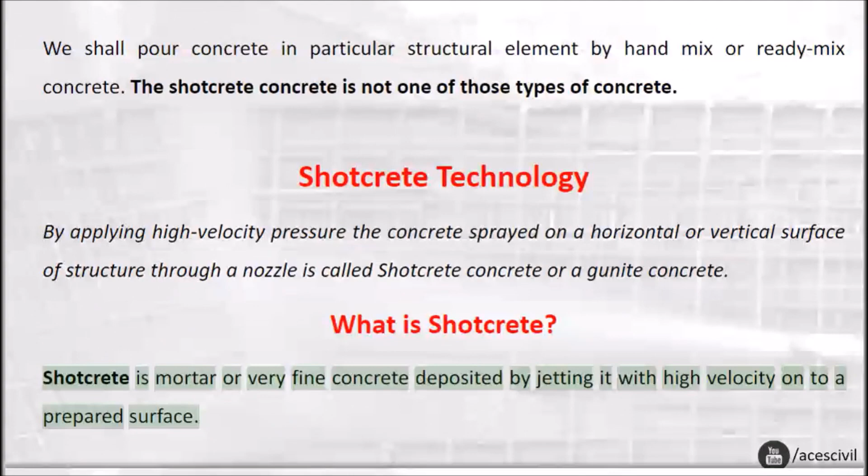By applying high-velocity pressure, the concrete sprayed on a horizontal or vertical surface of a structure through a nozzle is called shotcrete concrete or gunite concrete. What is shotcrete? Shotcrete is mortar or very fine concrete deposited by jetting it with high velocity onto a prepared surface.

Shotcrete offers advantages over conventional concrete in a variety of new construction because of fewer formwork requirements, requiring only a small portable plant for manufacture and placement. It is capable of excellent bonding with a number of materials, and this may be an important consideration.

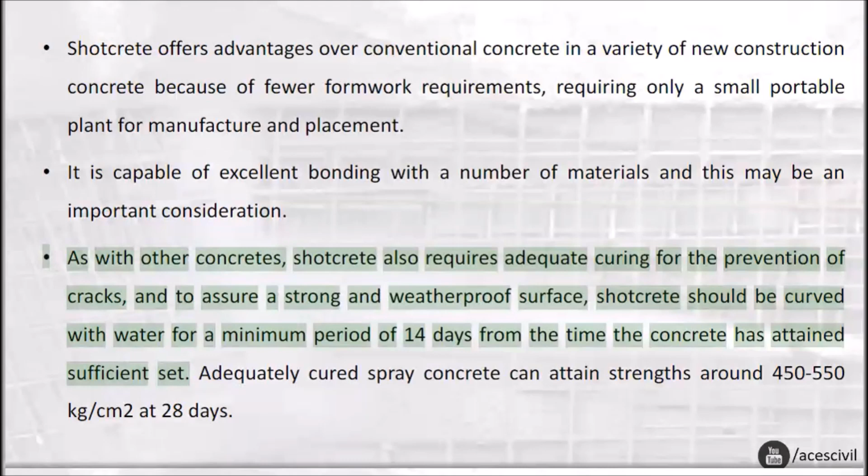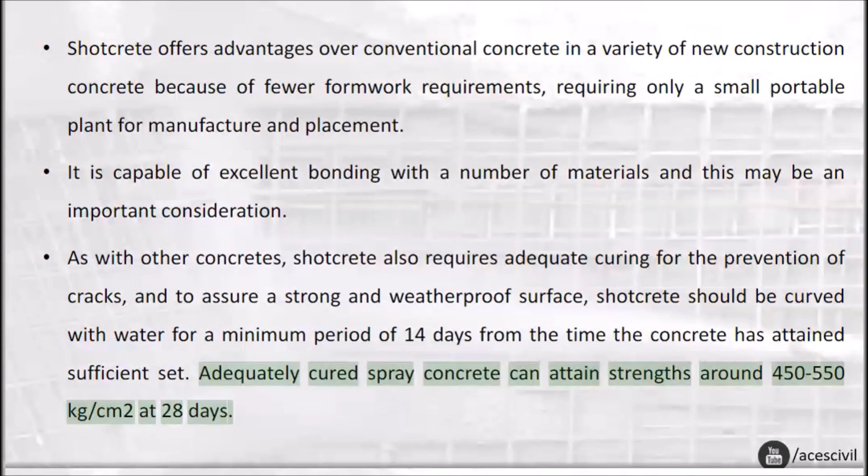As with other concretes, shotcrete also requires adequate curing for the prevention of cracks, and to assure a strong and weatherproof surface, shotcrete should be cured with water for a minimum period of 14 days from the time the concrete has attained sufficient set. Adequately cured sprayed concrete can attain strengths around 450 to 550 kg/cm² at 28 days. Sometimes instead of concrete, mortar will also be applied on the structural surface.

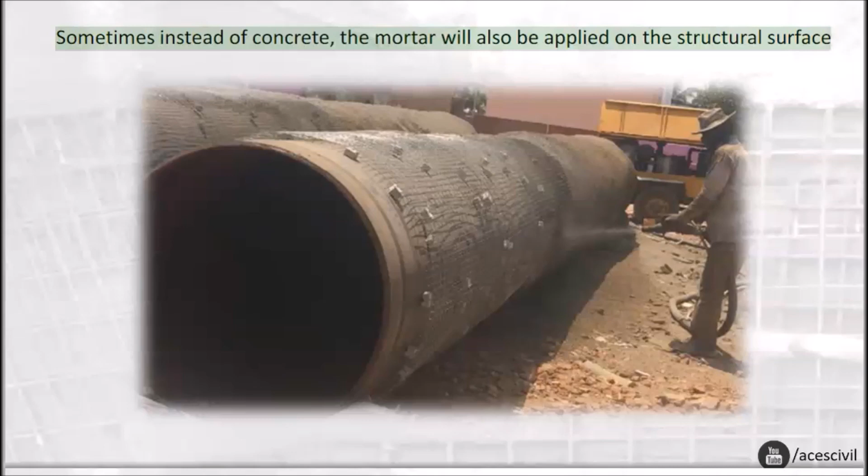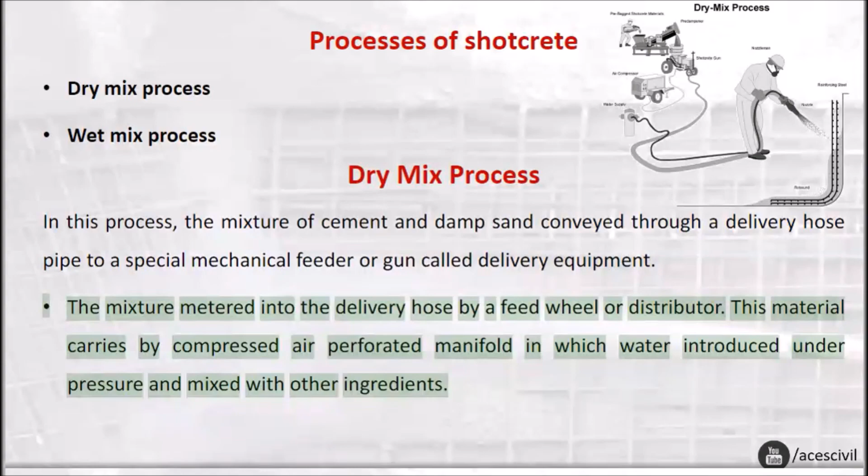Processes of shotcrete: dry mix process and wet mix process. Dry mix process. In this process, the mixture of cement and damp sand is conveyed through a delivery hose pipe to a special mechanical feeder or gun called delivery equipment. The mixture is metered into the delivery hose by a feed wheel or distributor. This material is carried by compressed air to a perforated manifold in which water is introduced under pressure and mixed with the other ingredients.

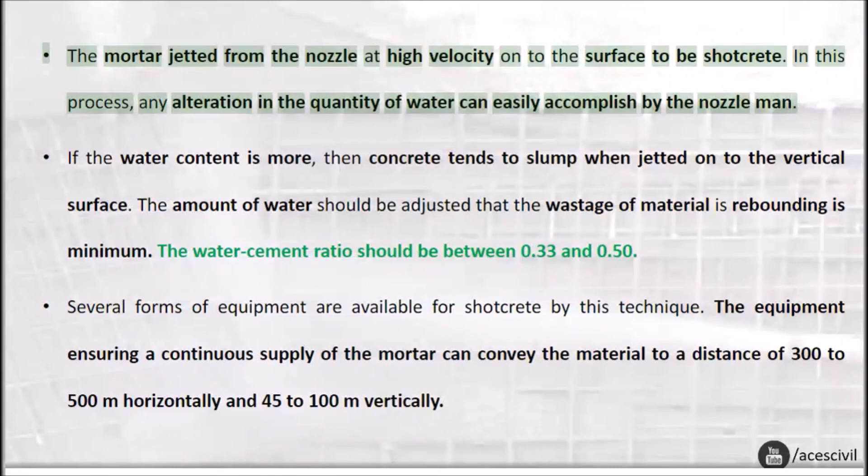The mortar is jetted from the nozzle at high velocity onto the surface to be shotcreted. In this process, any alteration in the quantity of water can easily be accomplished by the nozzle man. If the water content is more, the concrete tends to slump when jetted onto a vertical surface. The amount of water should be adjusted so that the wastage of material as rebound is minimum. The water-cement ratio should be between 0.33 and 0.50.

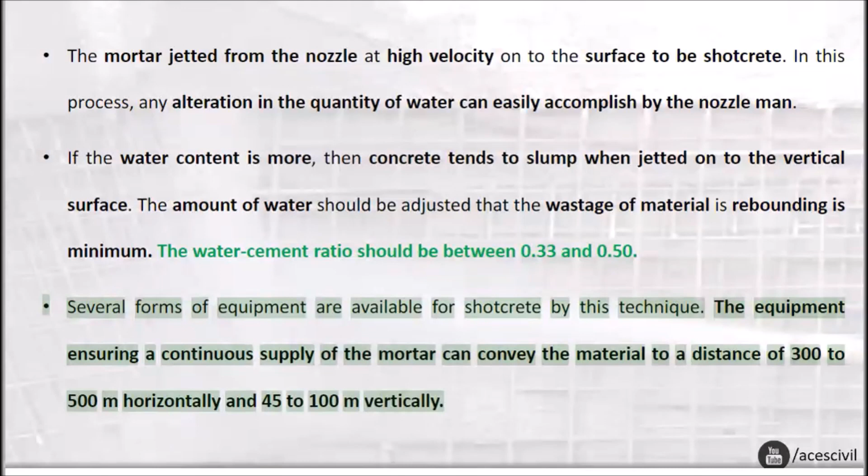Several forms of equipment are available for shotcrete by this technique. The equipment ensuring a continuous supply of the mortar can convey the material to a distance of 300 to 500 m horizontally and 45 to 100 m vertically.

Wet mix process. In this process, all the ingredients such as cement, sand, small-sized coarse aggregate and water are mixed before entering the chamber of the delivery equipment. The ready mixed concrete is metered at 7 atmospheres to a nozzle, where additional air is injected to increase the velocity and improve the gunning pattern. Equipment capable of placing concrete at the rate of 3 to 9 m³/hour is available.

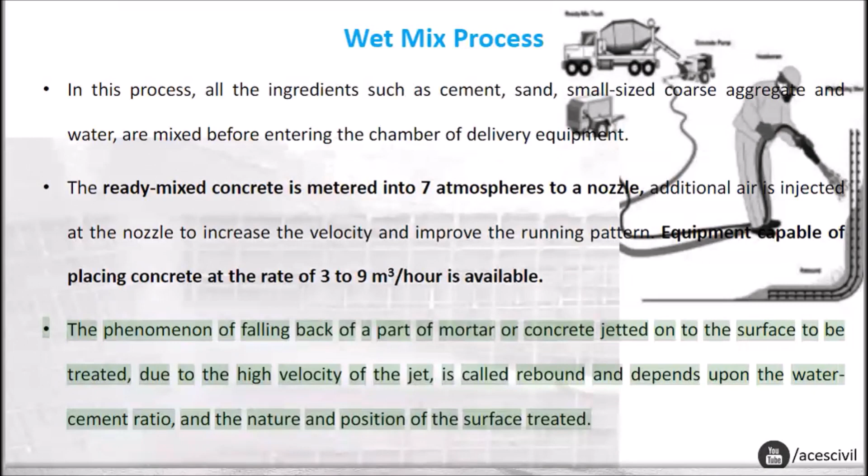The phenomenon of falling back of a part of the mortar or concrete jetted onto the surface to be treated, due to the high velocity of the jet, is called rebound, and depends upon the water-cement ratio and the nature and position of the surface treated. The approximate range of rebound is 5 to 15% for horizontal slabs, 15 to 30% for sloping and vertical surfaces, and 20 to 50% for the treatment of overhead surfaces and corners.

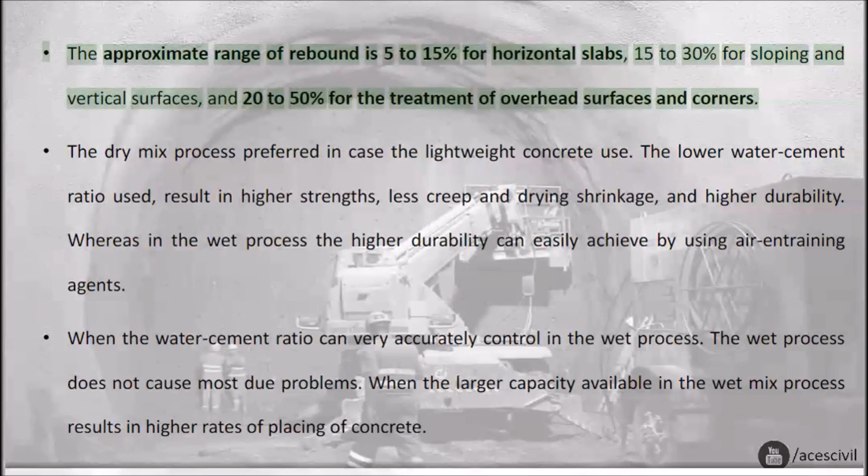The dry mix process is preferred in case lightweight concrete is used. The lower water-cement ratio used results in higher strengths, less creep and drying shrinkage, and higher durability. Whereas in the wet process, higher durability can easily be achieved by using air entraining agents.

The water-cement ratio can be very accurately controlled in the wet process. The wet process does not cause most dust problems. The larger capacity available in the wet mix process results in higher rates of placing of concrete.

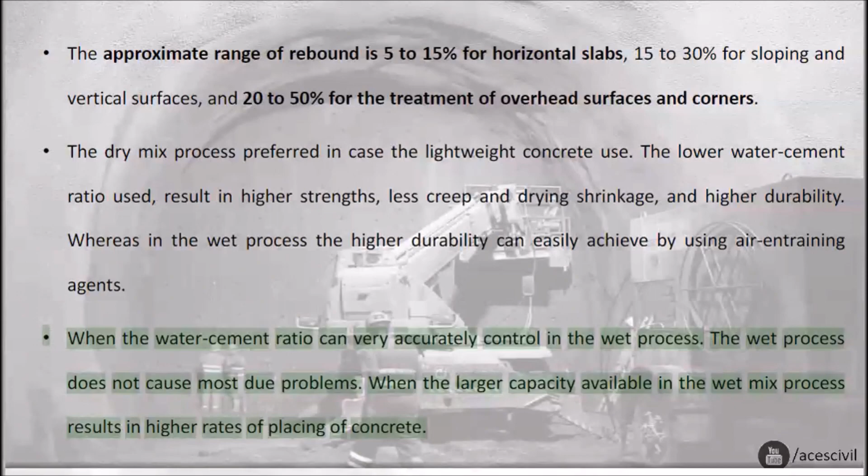Shotcrete concrete mix design. The mix ratio for shotcrete concrete is the same as what we use in conventional concrete. The mixing material and water-cement ratio may change since shotcrete is mostly used in waterlogged areas or the seashore. The concrete mix design may change as per the requirement where it would be used.

The components of the concrete mix shall be weight batched before mixing by a proper weigh batcher. Batching shall be based on the weight of single components with accuracy within plus or minus 1.0% of the values corresponding to the selected type of mix.

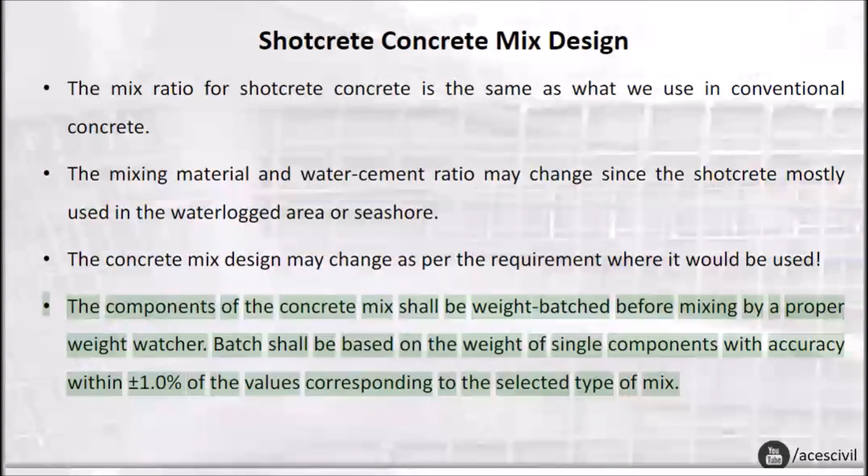Reinforcement for shotcrete concrete. The reinforcement for shotcrete concrete depends upon the purpose of use, because sometimes steel fabric wire will be used as reinforcement. Mostly TMT will be used as reinforcement. When shotcrete concrete is applied on mild steel pipe, 13 gauge or 14 gauge steel fabric wire will be used as reinforcement.

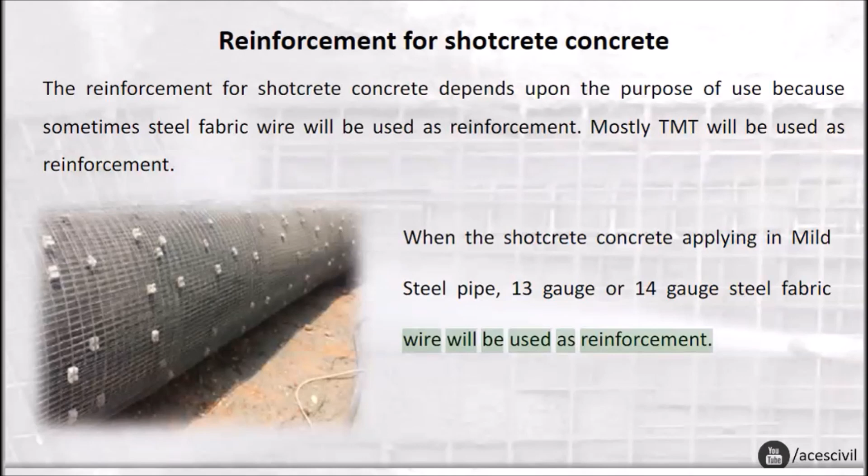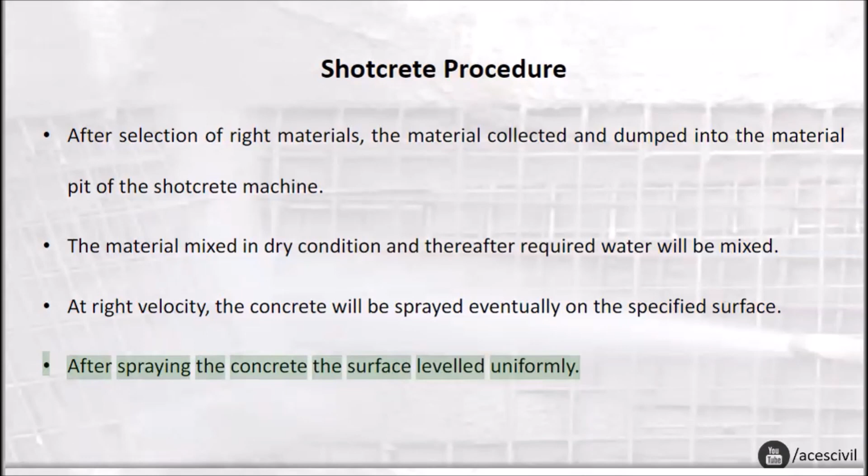Shotcrete procedure. After selection of the right materials, the material is collected and dumped into the material pit of the shotcrete machine. The material is mixed in dry condition and thereafter the required water will be mixed. At the right velocity, the concrete will be sprayed on the specified surface. After spraying the concrete, the surface is leveled uniformly.

Properties of shotcrete. A small maximum size aggregate is used and cement content is high. It should enhance durability in most cases. Whereas conventional concrete is consolidated by vibration, shotcrete is consolidated by the impact of a high-velocity jet impinging on the surface. This process not only increases the cement content due to rebound but also brings about different air void systems affecting the durability of shotcrete.

The application procedures have a greater effect on the in-place properties of shotcrete than the mix proportions. Shotcrete specimens are usually sawed from test panels of about 1 meter square and 75 mm thick made by gunning onto plywood forms.

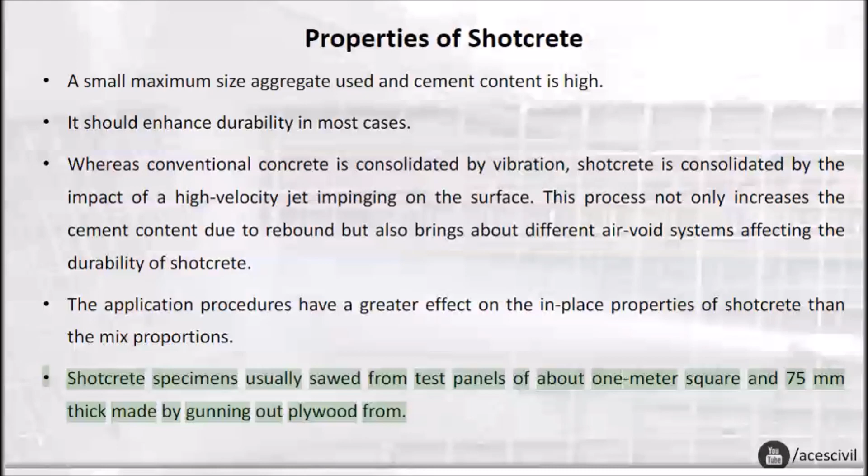Applications of shotcrete. Shotcrete is widely used in different constructions such as thin overhead vertical or horizontal surfaces, particularly curved or folded sections, canal, reservoir, and tunnel lining. It is also used in swimming pools, water retaining structures, and pre-stressed tanks. Shotcrete has been successfully used in the stabilization of rock slopes and temporary protection of freshly excavated rock surfaces.

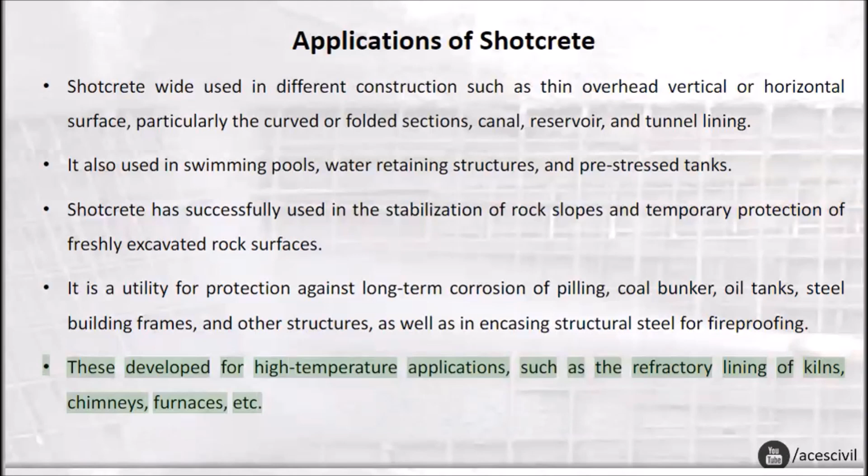It is useful for protection against long-term corrosion of piling, coal bunkers, oil tanks, steel building frames, and other structures, as well as in encasing structural steel for fireproofing. It has been developed for high-temperature applications, such as the refractory lining of kilns, chimneys, furnaces, etc.

Uses of shotcrete. It is very effective in repair and rehabilitation works. We can pour concrete either on a horizontal or vertical surface. Mostly shotcrete is used to construct a retaining wall where the soil is very loose. Shotcrete concrete is mainly used in underground oil lines or water pipelines where the pipe is buried under the earth, to avoid pipe corrosion. To avoid internal damages of the surface.

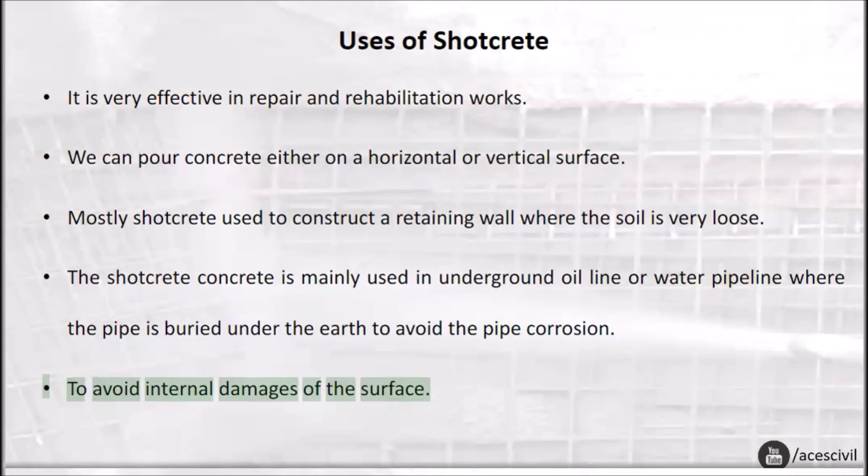Advantages and disadvantages of shotcrete. Advantages of shotcrete concrete: it can reduce manpower. Only minimal formwork is required. Economically good compared to conventional concrete. We can easily control the water-cement ratio. Cost-friendly for repair and rehabilitation work.

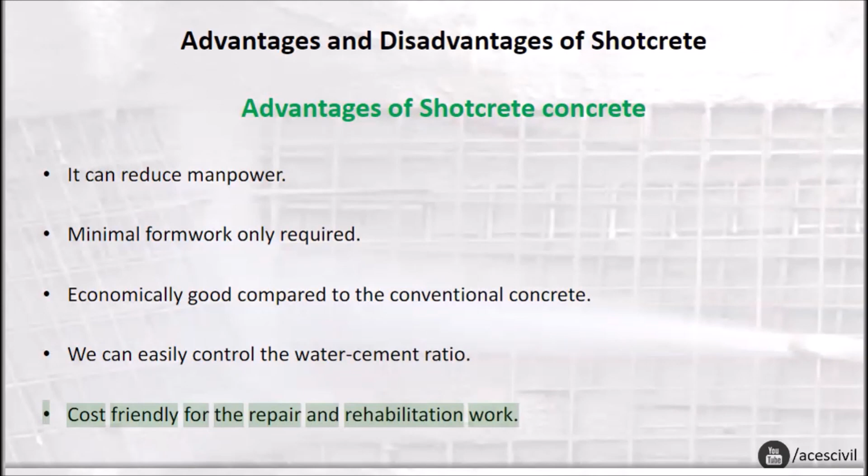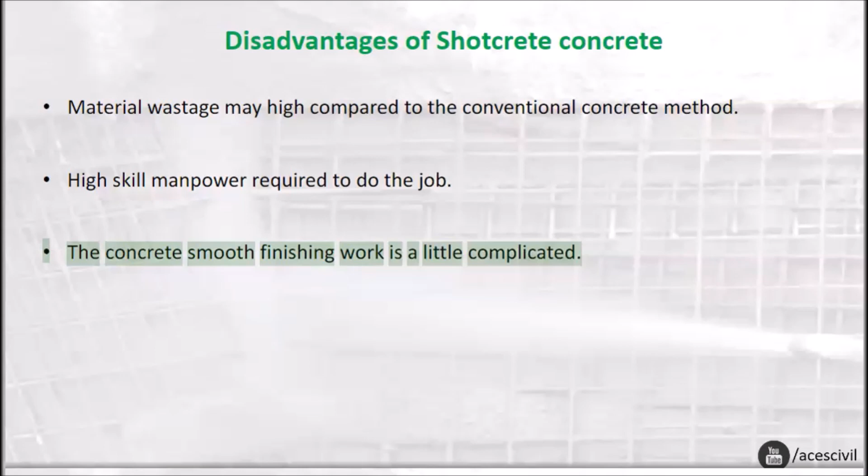Disadvantages of shotcrete concrete: material wastage may be high compared to the conventional concrete method. Highly skilled manpower is required to do the job. The concrete smooth finishing work is a little complicated.